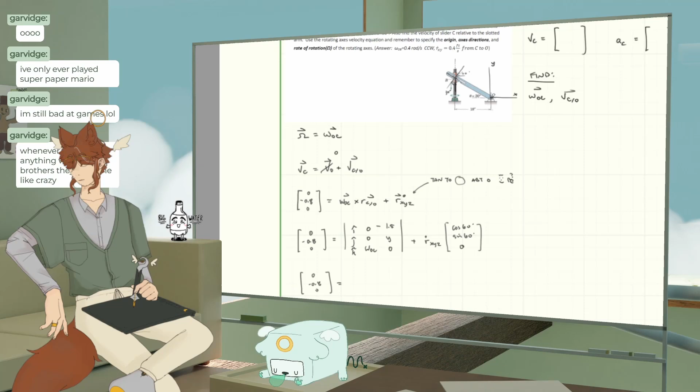I redid this, by the way, and I figured out what I did wrong, just in case anybody's interested. The thing about rotating axes is we were defining it like this, which you can do, and it's actually not that bad to do in this case, but I think one velocity I had defined wrong - I defined it in the global axis, not the local rotating axis, and I was getting the wrong answer. So I redid it in an offset rotating axis from the link, so the rotating axis is still in X and Y. We define it all in X and Y, which to me is still kind of like I'm trying to see how it would look. But it's just that this rotating axis sort of rotates with it, which to me is like, why would you do that? But I guess it makes sense, it's just about the geometry you're given.

I don't know if I started this one. Okay, I'll do work with you, sigh.

I should play Danganronpa 2 on stream. I feel like that would be fun.

Maybe I'll try and make Sundays like - 260 assignments, holy shit. I think I have like 40 that I grade per week, because they're group assignments, and the groups range from like 2 to 5 people, but usually land around 3 or 4. So it's probably like 120 people - I only grade for 3 sections. They're really easy to grade too. I should probably be nicer, I realize I feel like I'm a mean grader, but I'd rather them get a bad grade and think 'okay, I actually need to step this up' than be nice and get a grade and then not do any work, because it's a small part of the grade for the thing I'm grading.

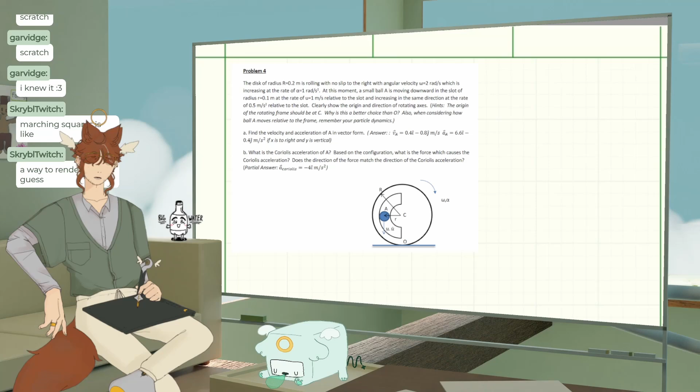I'm skipping problem 3, by the way, because it depends on problem 2, so once I try problem 4, we have to do acceleration and velocity, so this will probably help.

Oh god, also the Coriolis. I took a quiz on the Coriolis acceleration, it was just vector directions. I got a 4 out of 10 on it, so we're gonna figure it out here.

So a grid of points with value... oh, no, it was okay.

The quizzes are like 5%, and there's one that happens every homework plus extra ones. Getting a 4 out of 10 is kind of funny. It was 5 questions, each worth 2 points, so I got 3 wrong.

Some of them I second guessed myself, so the first thing I answered was right, and then I was like, I don't think it's that. I was also doing it in my head, which is bad.

So a grid of points with value 0 to 1. Some square marches across this grid checks the points at its corners. Oh, interesting.

Okay, let me write some givens. Is rolling with no slip to a right. Okay, so R, that's probably not useful right now. Maybe it is. No, it's not. I lied, I don't know why I wrote that twice. Angular velocity to the right with angular velocity 2 radians per second, that's negative. Plot omega c.

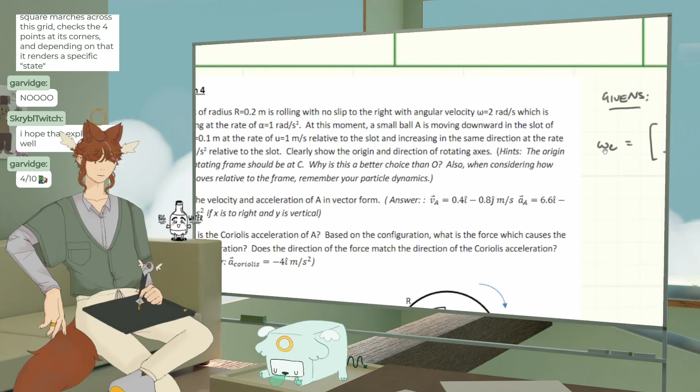Yeah, clockwise, increasing at a rate of 1.

At this moment, the small ball A is moving downward in the slot of radius 0.1 at the rate of that. Oh, interesting. So velocity, this is r dot, xyz of A. I guess I can just say that.

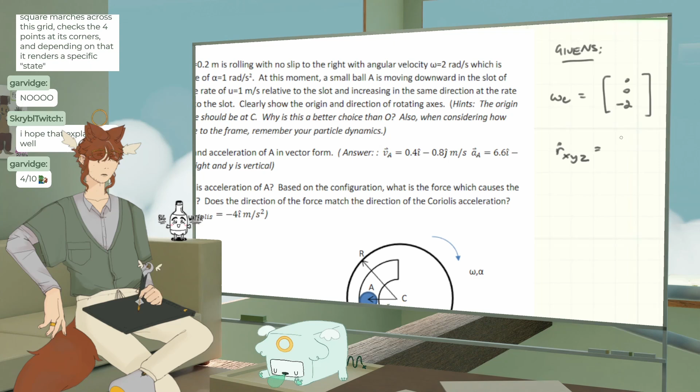So the thing I don't really... I found a little thing in PETG and I've been trying to break it. I can't. Actually it's very interesting.

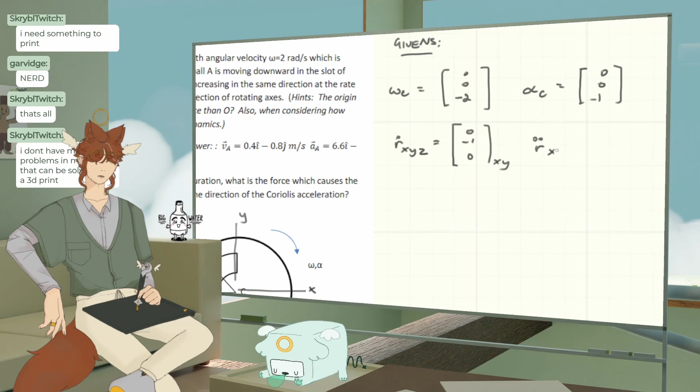Still, it's still kind of churning in my brain to figure out, because I'm so used to the relative velocities being not the actual velocities, you know? Don't have many problems in my life that can be solved with a 3D print.

Well, what if you want to make a desk organizer, or make a phone holder, or something like that.

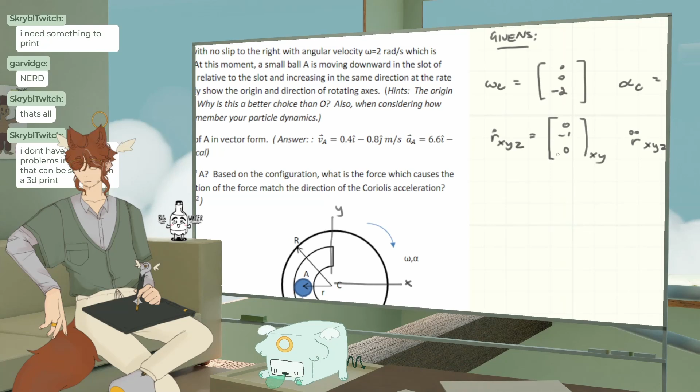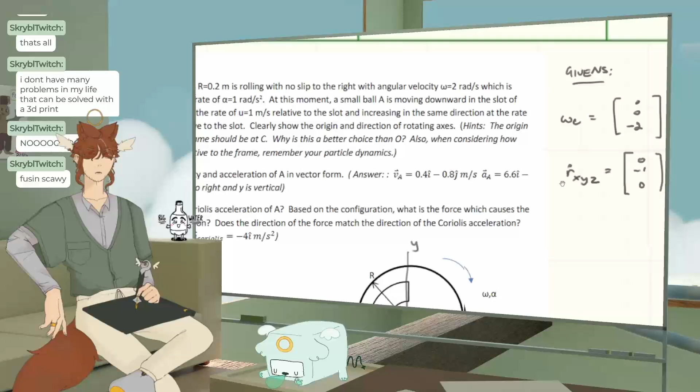No? Damn, Fusion's so not scary. But I guess that's because I came from SolidWorks, and SolidWorks is like, oh, you wanna undo something? Fuck you, I'm deleting your whole model.

Clearly show the origin. Okay, the origin is C, and the direction of the rotating axes. The origin of the rotating frame should be at C. Yeah, I figured. Also, when considering how, yeah. Find the velocity and acceleration of A in vector form.

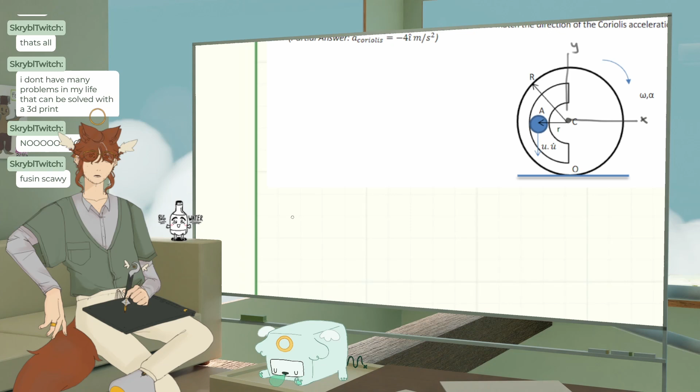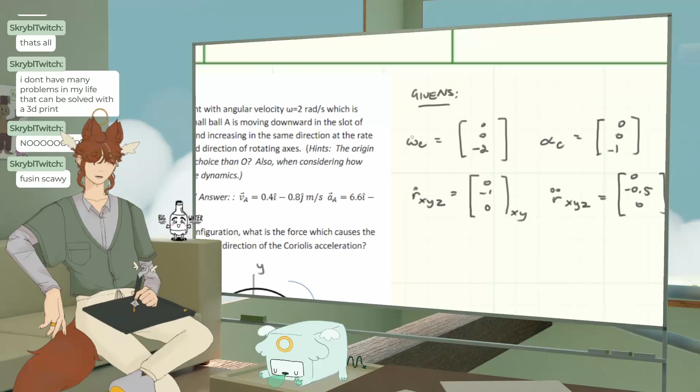Okay, so omega. I keep thinking, I don't know why, I don't remember where I heard this, but there's one person who said like omega bobega, and every time I write omega now, I just think of that. It's really silly. Sorry guys.

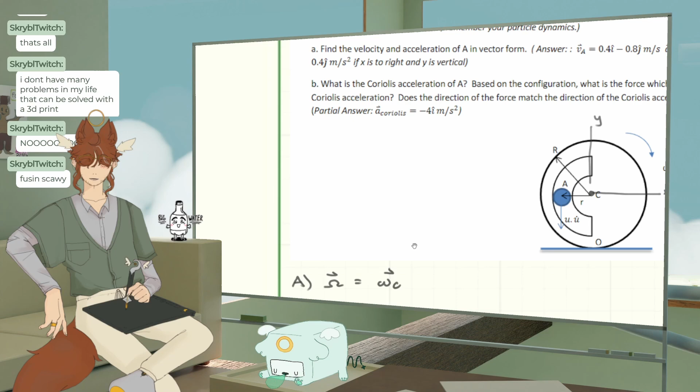I'm sorry for being silly in my intermediate dynamics class. Somebody was asking me about one of these questions. I'm like, I'm gonna be real, dog, I haven't done any one but number 1, and I got number 1 wrong the first time I did it like 3 times. So,

Alright, V of A equals V of O plus, no, sorry, V of C plus, oh shit, C is moving. We can figure that out. Plus omega cross R, C with respect to A.

Nope, that's not right. A with respect to C plus R X Y Z, R dot. I need to figure out a better notation than R dot because I'm so blind to these. I write these and then I just don't look at them. I don't know how to fix that. I'm just dumb. So omega C cross, I'll write it out.

Omega C cross R C with respect to O, plus omega C cross R A with respect to C plus, and if I get this right, then the world is awesome and everything is great. I can write this down. Nope, that's the wrong one.

Okay, so omega C cross R C with respect to O. Omega C is 0, 0, -2. I've also been trying to be a little bit better about some of these easy cross products,

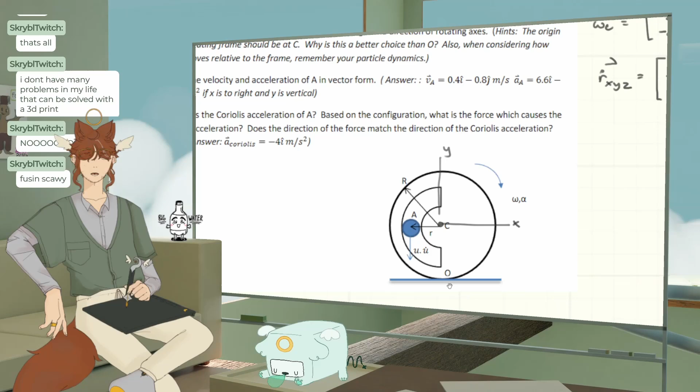I really have no clue. No clue about intermediate dynamics. It's okay, you don't need a clue.

Let's see, negative K crossed with negative I, positive J. And then I think this is right. The velocities I'm good at.

I'm chilling. Oh, printing. Should I help with printing or with intermediate dynamics or?

Wait, shoot, 0.4, negative 0.8. There we go, baby. Or am I? You can keep grading, go ahead. I got it, look at this, beautiful.

My office hours don't start yet, though. My office hours are when I'm live.

Okay, I chose the right coordinate system too, which is good. I'll get it, I just don't understand the... I think for the other one, I need to have something that defines the other velocity, so then it doesn't, like... I don't know, so many unknowns.

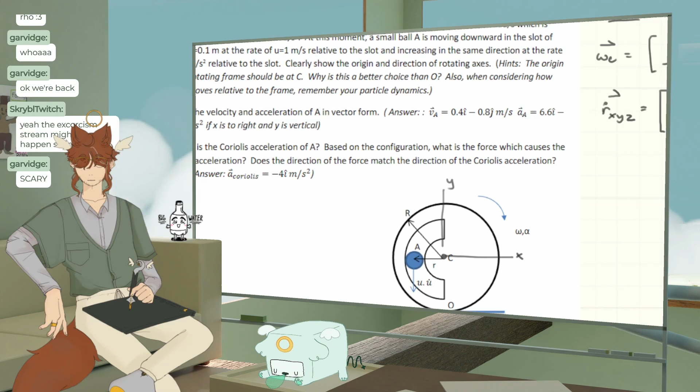Let me see if my settings changed. It was a mixing thing before. Man, that's so annoying, now I gotta put a blacklist on this stream, so I have to edit it. Needs editing, what is this called? This is the 10.6, okay. Man, okay, well whatever. What was I doing? Oh, I was checking my settings, I just closed them, fuck. Sound, did we play sound? No. Input. What the what, wait, output. I don't know, that might not be it. All sound devices. That is the speakers, that is not it. Wait, oh wait. I don't know. I'll look into it again. Fuck, that's so annoying, oh my god. Well, whatever, it is what it is.

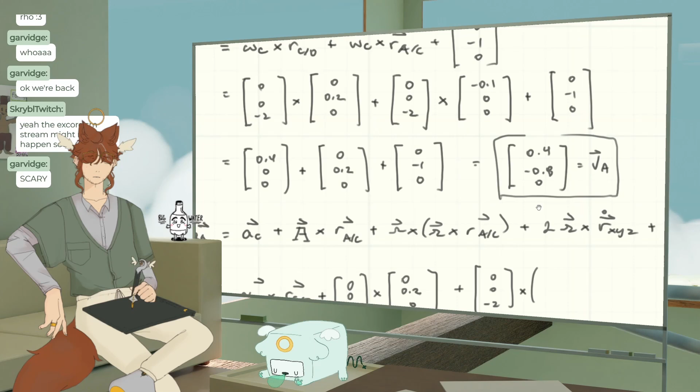What was Big Alpha? Big Alpha was 0, 0, -1. RAC is 0, 2. Plus, okay, the cross products. Omega is 0, 0, -2, crossed with 0, 0, -2, crossed with... wait no, we crossed this already. Omega cross RAC is right here, so that's this one. That is one of the things I like about these problems, is you get to reuse that. And then 2 times omega cross r dot xyz, did we do that one? I don't think so. R dot is 0, negative 1, 0, plus 0, negative 0, okay. A long boy, oh I just started putting stuff in there. Oh I guess it's okay. Alpha C is 0, negative 1, 0. Wait, right? Yeah, I said it wrong, but yeah. R C O is the 0, 0.2, okay. Now we can start.

So negative k crossed with j is regular I. Yeah? Yeah, negative k crossed j, regular I, hopefully. And then negative k cross, that's negative I, times 2. The rubric to this assignment is wrong? Oh, is it like out of a certain points and they made it out of too many or something? They reuse it and they just like... negative times that is, wait, k crossed with j is negative I, that's positive. Yep. It includes an example for the correct answer, and their example is wrong. Oh, like it has an issue in it?

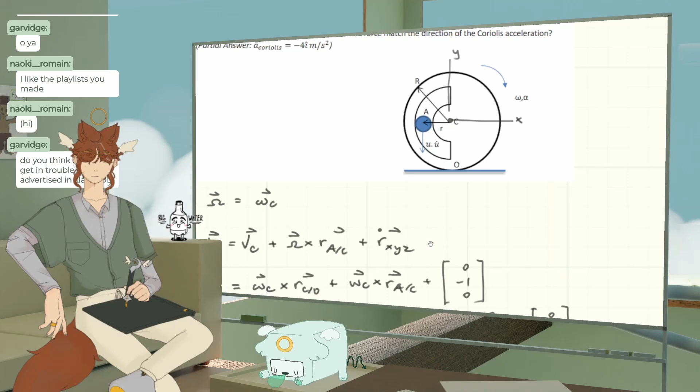Oh shit, what did I... fuck, oh shit. It needs to be positive. How is it positive? Wait, if Y is vertical, yeah, how is it positive? Because this would be negative. Wait, increasing in the same direction. Yeah, what? Oh my god. Okay, okay, well let me check my other signs.

Get rid of this. Okay, so omega is... yeah, okay, so omega is good, and then omega here is good, and that one doesn't need an omega. And then this one, omega cross R-A-C, that is this one, which is this one, which is this one. Okay, and then this one is good. This one, R-X-Y-Z, yeah, that one's chill, and that other one should also be chill. What?

What if I just delete it and redo it? I feel like that's the one thing that never gets easier about engineering, is just accepting that you have to delete stuff. It's so sad. Omega C is 0, 0, negative 2. And C with respect to O is the... point 2.

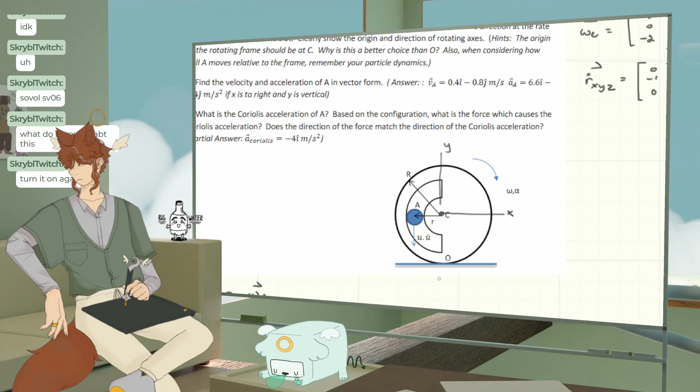Well, you Google it - you say Sovol ejecting sparks from outlet.

Nothing. Did you put the word Reddit after Sovol 3D printer sparks when plugged in? Printer giving shocks and sparks, one year ago. Unplug it and go through the wiring. That's bad - bad grounding in your printer or plug-in electrical system. Ditch the adapter, it's not grounded. Power plug's probably not grounded. Get the fuck away from that.

Yeah, if your plugs are - yeah, that could be a house electrical issue. Thumbs up.

Maybe the outlets in my house aren't grounded. Like what, if your house is old, it's possible?

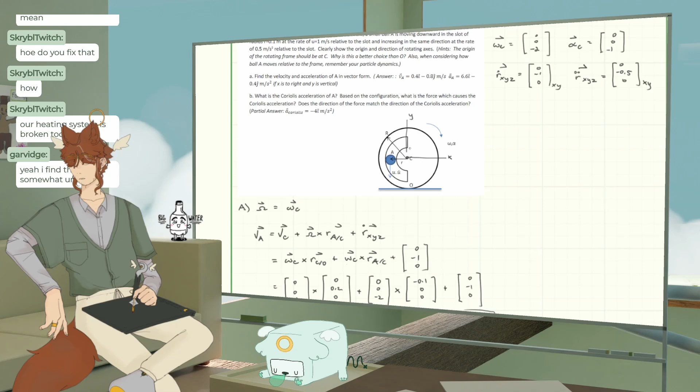That shouldn't be like... wait, how do you fix that? Well, to ground it, you just have to essentially connect your system to... I find that somewhat unlikely.

It's probably not, but I mean if you said it gives a blue light when you plug things in sometimes, and it's not just your printer, then maybe it's possible. Or maybe something happened where... did you try it in a different...

Oh, the transformer died and the system is so old. It is an oldish house. Okay wait, for every outlet? Yeah, I was gonna say, maybe try plugging it into a different outlet.

Or maybe try plugging it into like a friend's outlet, in a house that's not... maybe it's just that. Maybe try plugging it in downstairs if you plugged it in upstairs before.

Did I have a... maybe my radius... let's see, my radius from A to C is negative, that's right. Our A to C is just that. It shouldn't be...

I have plugged it in downstairs, and it gave the sparks. I mean, there's also the likelihood that it's just like...

Maybe it is, like if you put it in 120 and you plugged it into 240, then you probably fried the motherboard. So if you did do that somehow, I don't know, that doesn't seem likely because EU is not 120, but...

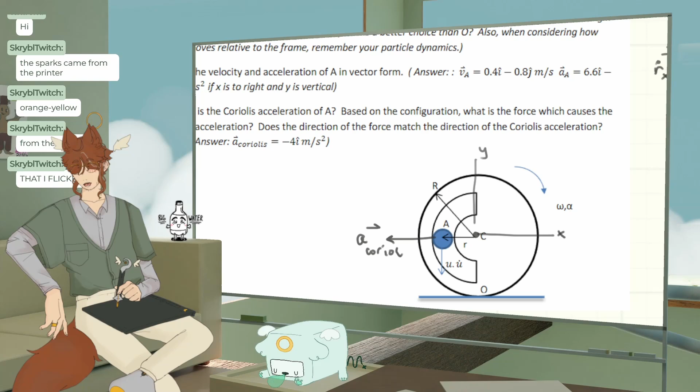Like the plug? Okay, maybe. It's gotta be like, no, this is from the switch. Okay, that's not good. From the switch is not good. I thought you meant from the cord. I don't know. I feel like you should just email the guy. Your printer's like turning into, like, becoming sentient.

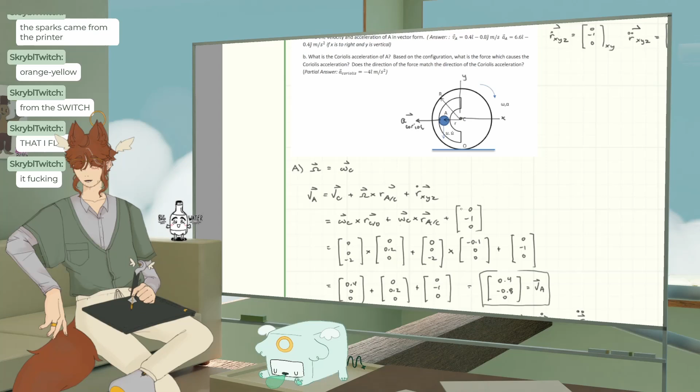Based on the configuration, what is the force that causes the Coriolis acceleration? Does the direction of the force match the Coriolis acceleration? No. It comes from the normal force. It ejected from the edge of the switch.

I don't know what a Sovol switch is. Sovol, I'm thinking of my printer. The switch is a pretty weird place for sparks to come out of.

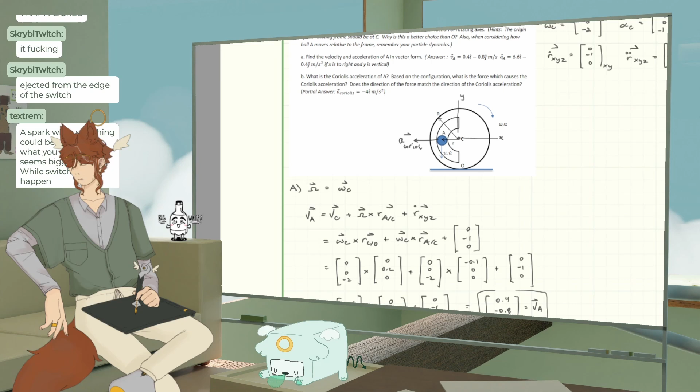Yeah, usually a bigger arc while switching can happen. If it's a large... wait, did you see where it arced to? Maybe it's some... I don't know. If it's arcing, it could be something that got dislodged, there's so many cases. There wasn't an arc. Oh, wait, but there was a spark, right? Oh, the spark, you're saying it just was like a straight line? It wasn't arcing to anything. Well, I don't know if that's better or worse. Again, I'm not the EE.

The force is... yeah, angle grinder, yeah, you mentioned that.

I think it's the normal force that causes that. A true Coriolis acceleration needs a force to cause it. Does the direction of the force match the direction? No, so the directions do not match.

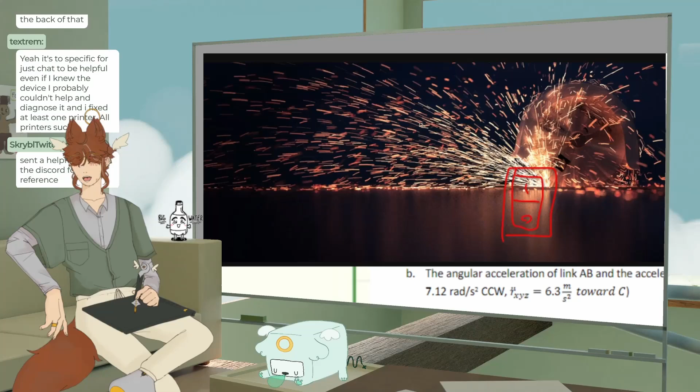Oh my god, okay, yeah, okay, yes. It is, this is the image they sent. It's not exactly helpful. Was it this many? That, I would not plug that back in ever. Let me see, let me... that's crazy. Like a quarter, okay. Power switch starting to bug.

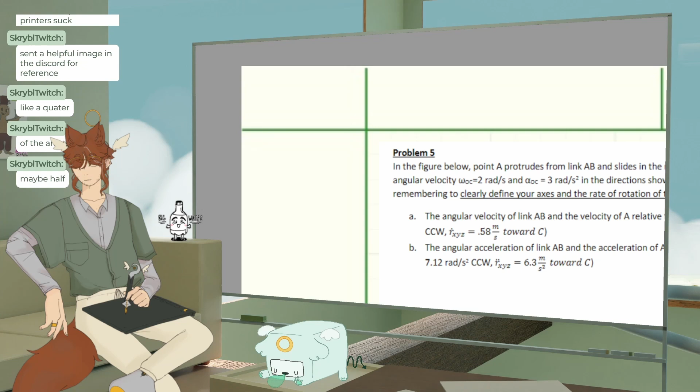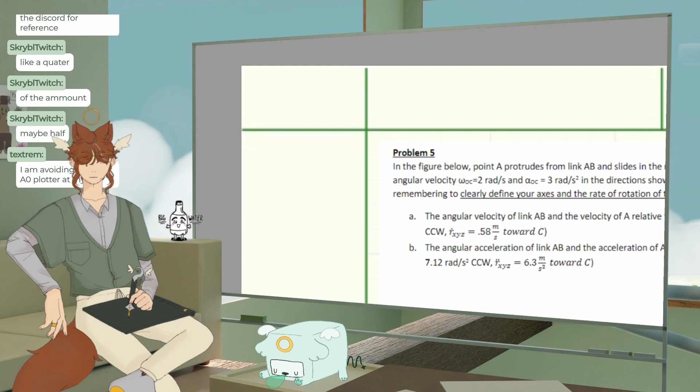Turning off. Wait, look. Oh, no. Oh. June 23rd.

Had also the problem where the switch glitched and noticed it was warm. Took it apart completely and found the metal contacts inside had visible burn marks from arcing, visible melting of the red plastic switch, plus discoloration of the heat shrink of the connected cable. This thing was overheating.

I'm avoiding fixing an A0 plotter at my uni. That's so real. I've never tried using a plotter. What do people actually use plotters for?

It says... Okay, this was 2023. I would, if you have warranty, email support and they'll probably help you out. That's what it seems like. Because if you replace it, then...

Why do I keep seeing small sparks from the light outlet? Yeah, voltage spike across the contacts. That's just like that's how it be. We get a little arc sometimes when we plug things in because of that.

I was removing my PEI sheet today and noticed sparks jump from the PEI sheet to the pins used to align it at the back of the plate. Anyone have this issue? Not sure what might be causing this, but disturbing nonetheless. Solved. USB sparks. USB sparks.

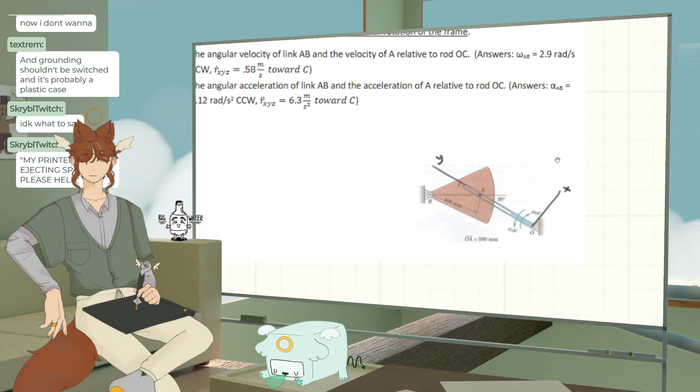Grounding shouldn't be switched, and it's probably a plastic case. It might be metal, a lot of printers have metal frames, like aluminum extrusion. I don't know what to say to support. Say hey, yeah literally you could say that probably. We'll tell them where the sparks are, and maybe send them a picture of the switch. Or just tell them that and then say what you did to try and fix it.

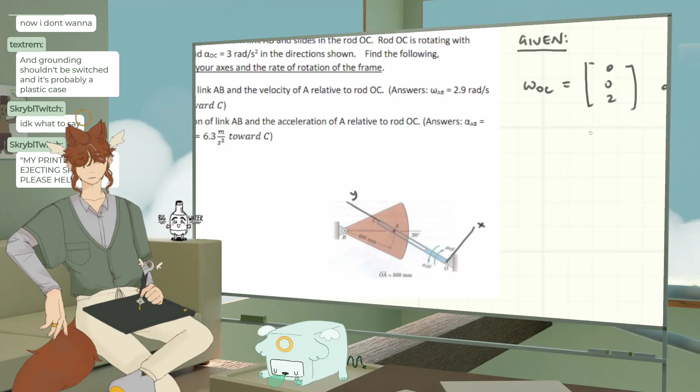Slides in rod OC. OC is, so omega OC is alpha OC is what, 3 radians per second squared in the direction shown. Okay, so that one's positive, that one's, oh, that's really hard to see. No, alpha's positive, omega's negative.

I'm sorry they're ejecting sparks though, that must be so sad.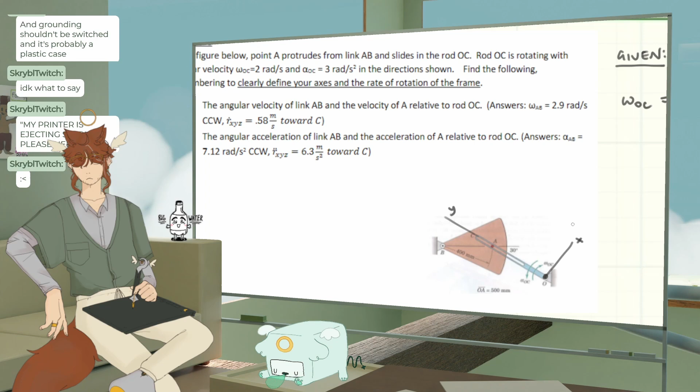Find the following, remembering to clearly define your axes and state the rate of rotation of the frame. Okay, my axes are defined. I guess, wait. OA is 500 meters. Okay, that's good. Millimeters. Yeah, I think this is a good...

As a mechie, I really love stuff like this, where it's like, oh, we just want to do this one thing mechanically. Or laser, we had both of them. Oh, laser cutter? That would be fun. I would love to try and design a printer, that would be so sick. I don't think I would be good enough, but I would enjoy it. I feel like you have to work with materials engineers, also.

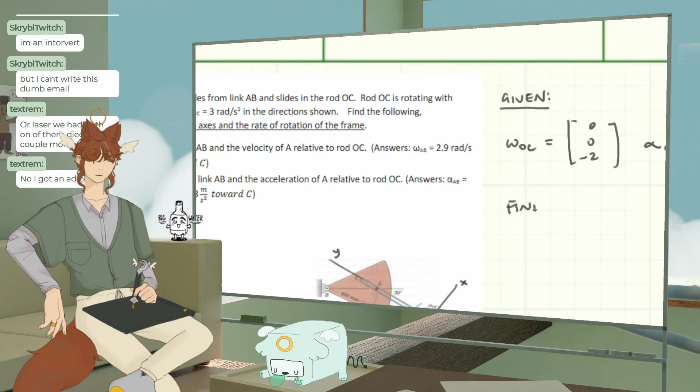So we want... find... oops. What do we want? AB... angular acceleration. Oh, angular velocity of AB. So omega AB... R, X, Y, Z. I don't really like the notation of this. This is like...

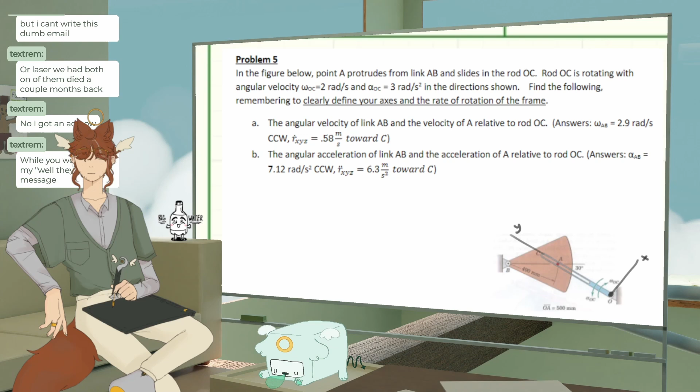Oh, well, they're just giant inkjets, and I'm more specifically interested in offshore wind and infrastructure. Yeah, I like doing stuff like this, where it's little systems that we kind of want outputs for. I would love to design like a 3D printer or something, it would be really cool.

I feel like maybe I'm getting this wrong because I'm not...

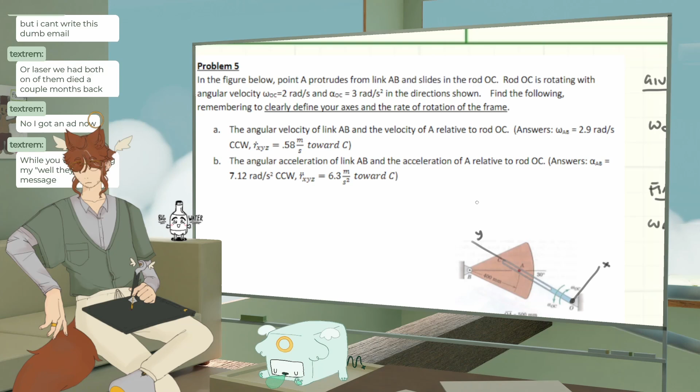No, that's just the acceleration of A that I was getting wrong. I don't know if they mean VO plus VA with respect to O, and this whole thing, so that would be the omega cross and the R. Or if they just mean the omega cross part. I think they mean both. We want VA of our little bit that's moving, and then VO, which is 0, plus omega OA. Do we know it? No, we don't.

I've heard it's better if you schedule for viewership growth. Yeah, probably, I never really... honestly, I probably should. I had never thought about it before because normally I don't have that many viewers, let's just be real. And a lot of people also kind of listen to me in the background, so... but maybe I should think about it. Maybe that would be better. I could do that.

Can you play League of Legends? Do you think I could play a game of League of Legends while doing a Dynamics problem at the same time? I've never played League, how involved is it? Is it like I have to actually do shit, or is it like watching shit happen?

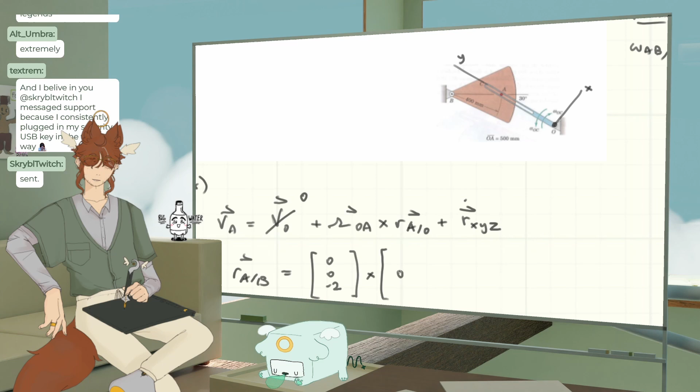When I worked, I did some support stuff, and I always liked answering the questions that were really easy because they were just like, it's chill, you know? It's like... okay, there we go, that's right. I have to just be careful because if I don't define this the right way.

What's the deal with outlets in my house glowing blue sometimes? I think google.com shall give us an answer that we seek. Why are my outlets glowing blue? Can you explain where the blue glow is happening? Why does an electrical socket emit blue-white light sometimes? Yo, your electrical system seems fucked. It's blue because the color is given off from nitrogen and oxygen gas in our atmosphere when they are excited, when the metal contacts are close enough for the electricity to move through the air. This is sparking that happens when an electrical arc is created in the air. If it is not stopped, it will cause a fire. 100% guarantee of fire if the sparking lasts more than a few seconds.

This is perfectly normal for certain types of power supplies. Well, that's the... you are creating plasma. It happens when an electric current is passing through a gas. It's called an electric arc. Sorry, I'm reading Reddit, some of these are not going to be right.

It happens as soon as I plug in the device, and it's only a flash and then goes away. It's startling and makes me jump. Good, that is normal, unsettling a bit, but as long as it doesn't happen on its own and you keep your hands away from the metal bits, you're perfectly safe. That's what it says, so... Does it happen only a little bit, or does it happen a lot? If it only happens a little bit, then it's fine. Then you're okay, it's normal. It's just like a voltage thing. Because electricity is weird, it happens like a 25% chance when I plug in some charger. That should be okay, I think.

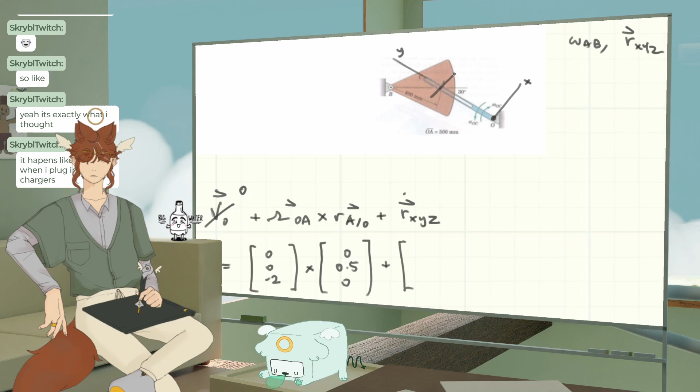Do I know RXYZ? I don't think so. I don't think I do. Do I know the direction of RXYZ? Yeah, it has to move around this way. But that's crazy. 60... sorry, I'm just talking to myself. Oh wait, shoot, no, it's not 60. It's just X. Oh, that's cool.

Been an electrician for a bit and rarely seen something like that, and I'm in Germany. While plugging in or taking shit out, it may happen. Oh, we got an expert in chat, thank god, because I do not know anything about EE.

Omega AB cross RAB is... RA with respect to B. Now we have to do the math, which is a little unfortunate.

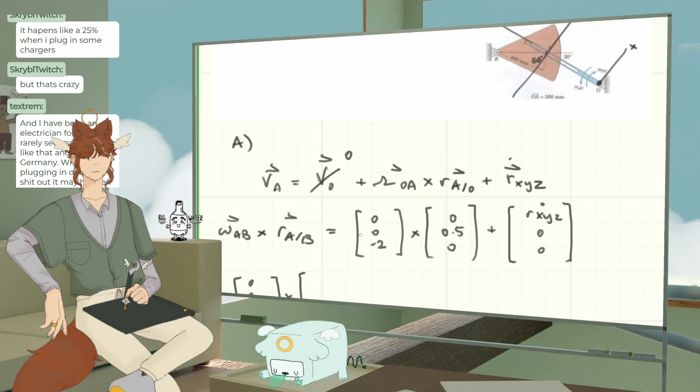That's 30, this is 60. Alright, in the x direction we have cosine. That's 0.4 cos 60, and 0.4 sine 60. Oh, that's actually not too bad. And it's negative there.

This one we're gonna have to do a cross product for, so I'll just write that in. A less fun cross product, I guess.

In my apprenticeship, I was mostly fixing home appliances like washing machines. Oh, interesting, you did an apprenticeship! Very interesting, I don't know a lot of people who do that, but I also don't go to a trade school. I guess you don't have to go to a trade school to do an apprenticeship, but for most of the mechies here, we tend to do internships instead.

Negative K crossed with J, so positive I.

Okay, we're making good enough headway where I think we might be able to finish this, which is great, because I didn't know if I was going to. Got a ping.

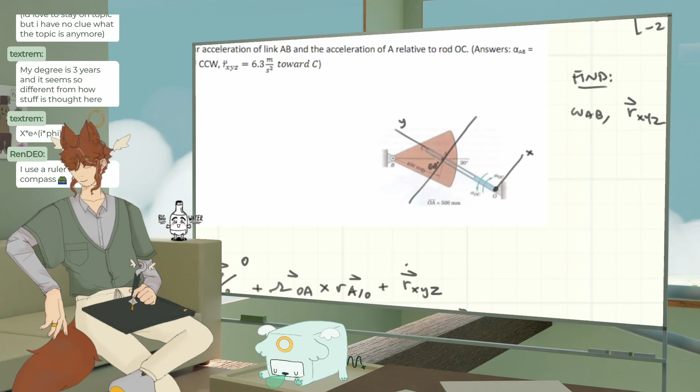I use a ruler and compass. Ooh, I miss my compass. I haven't used a compass in, man, like a year and a half or something like that.

My detailed drafting course, my degree is 3 years, and it seems so different from how stuff is taught here. Yeah, it's very interesting. I think the one thing I do like about it is I think it's a very accessible curriculum, which in some ways is good and in some ways is bad, because it's a little bit less rigorous than I think is good for a really stellar engineer. But a lot of the time you don't really need stellar engineers, and there aren't enough people who want to perform at that really high level. So I think that's why this sort of course I'm in is the way that it is.

But yeah, there's some good stuff. I definitely also on stream, I feel like I try to do my best I can to make it better than the raw stuff that I get thrown at me.

There's an MSc guy who's making a case for taking a historical approach to the subject: Euclidean, projective, non-Euclidean, differential, commutative algebra and curves, classic algebraic geometry, scheme theory.

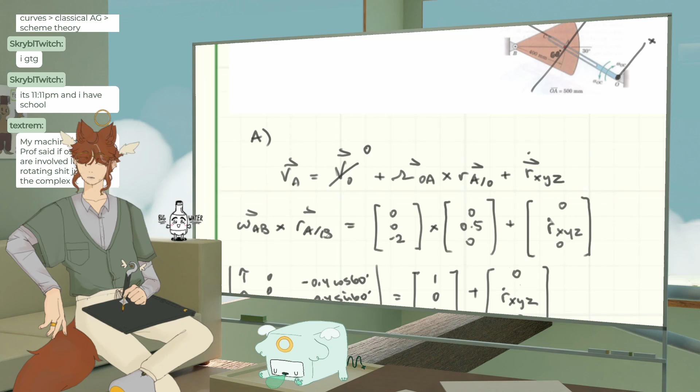My machine dynamics professor said if oscillations are involved, like some rotating shit, just go to the complex. It's interesting, we have a whole class on vibrations as well. I think it's because a lot of people end up in... we have a lot of partnerships with HVAC for my school specifically. So I think the fact that there's more vibrations, more of that kind of stuff, it also kind of depends because the concentration you take is more or less important. Like we have mechatronics and stuff, and mechatronics people have to take vibrations, and I'm in general because I just don't have a concentration really. So if you're doing mechatronics, you kind of have to know about vibration. And I think just the effect of, for audio engineering too if you were to go into that—I don't know, I'm kind of talking out my butt.

Projective geometry is pretty nifty. It's the geometry of high dimension perspective drawing. Oh, vanishing points, horizon lines. Interesting.

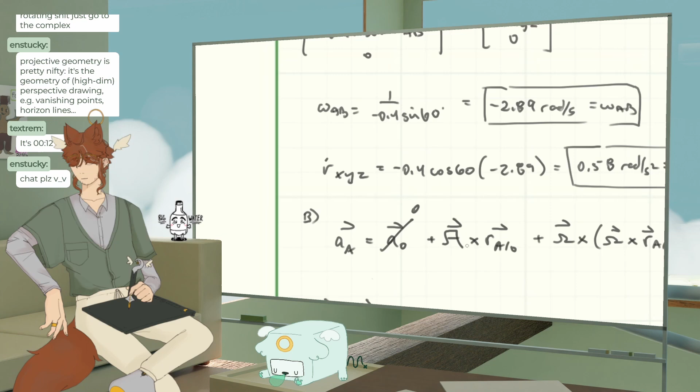Oh my gosh, it's 12. 12, 12, chat please. That's interesting.

So, just being able to describe those mathematically. What alpha do I have? I have, okay, alpha OC, which I think is the thing that I need. RA with respect to O. I should probably be redefining these myself until I get more comfortable with it.

2, -2? Uh-oh, it's not -2, that's positive. One of these is positive. Alpha is positive. And that's why we check things. -2. And then this one is... Nod, nod. Okay, that's sick.

I really want to learn enough about the language of proofs that I can read proofs. Because right now it's like, I can read them, but I wouldn't be able to write them. And I don't know all of the different higher level stuff about them.

0, 0, -2. R, X, Y, Z. We found that. So it's in the... it's 0.58 there. And this other one we don't know. Now this one will be in the possible same direction. But we don't know which way, so that's fine. We'll just assume it's positive. Okay, I think that should be good.

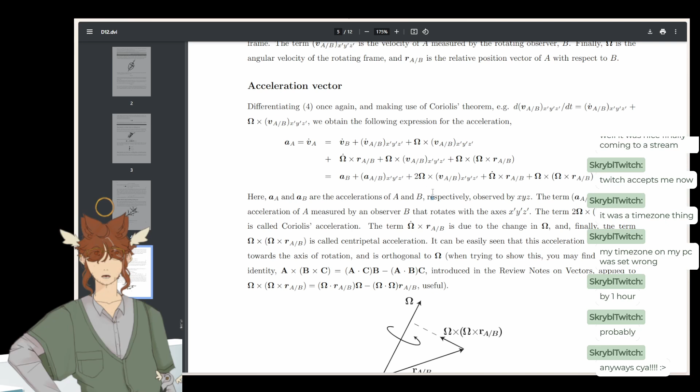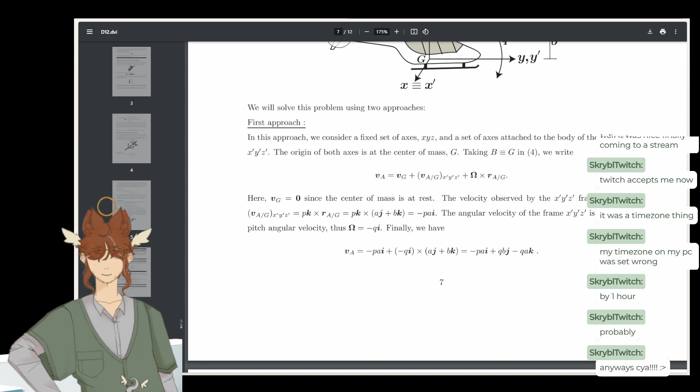No, when writing... that's fine. O equals negative... 0 equals negative this. Okay. So basically it's fine, I don't know what I'm doing wrong then. Let me change this to... I'll just change it to clip so I don't fuck everything up.

Let's see, so where is this hidden issue? We're supposed to be getting 6.6 I, and -4, I'm getting -4. If x is to the right and y is vertical, wait, I'm getting negative downward. -4, coming down.

Which, okay, let's just be clear. Well, okay, I guess if it's the acceleration, it could be going down. But I was gonna say, the velocity of it's probably going up a little bit. Hmm, 6.6 I.

Minus, oh wait, what is minus? Wait, okay, so we got that one right. So the 6.6 I is the only thing we have wrong. Okay, wait, we're closer then. Okay, so this part is right. But what about that 3.4?

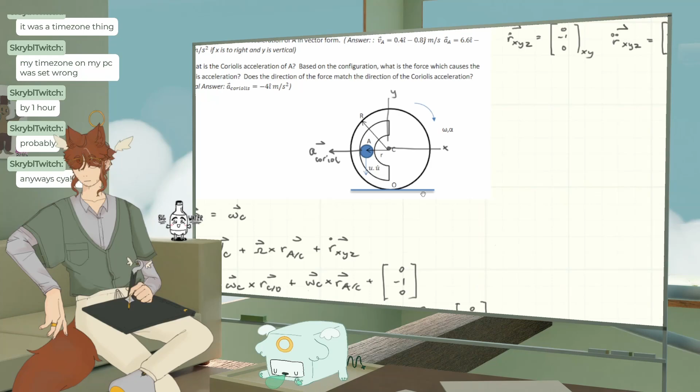Maybe this negative here is not negative. No, it's negative, it's definitely negative, it's definitely negative. Maybe this is supposed to be negative, the 0.2? What is the 0.2? 0.2 should be R A with respect to C. A with respect to C is negative. Okay, so that solved that problem.

So this is negative K crossed with negative J, which leads to a negative I. Wait, that didn't really solve the problem. Wait, yeah, because... wait a second. Wait a second, we didn't really solve the problem. Wait, that made the problem worse.

God damn it. Wait, this is supposed to be 2. No, wait, that's also wrong. What the heck is happening? Okay.

Omega is definitely -2, that one's not changing. R dot XYZ, is that definitely -1? Yeah, it's definitely -1. So what are we doing? What are we doing? And the radius doesn't matter here.

Oh wait, no, that one's fine. That one isn't gonna affect anything. So it's something over here, maybe?

I wrote up a short guide for your ANSYS troubles for computers, it's already been installed on. Oh my goodness, can you share that? That would be beautiful. You'd also be saving all of my friends, by the way, because none of us want to use ANSYS.

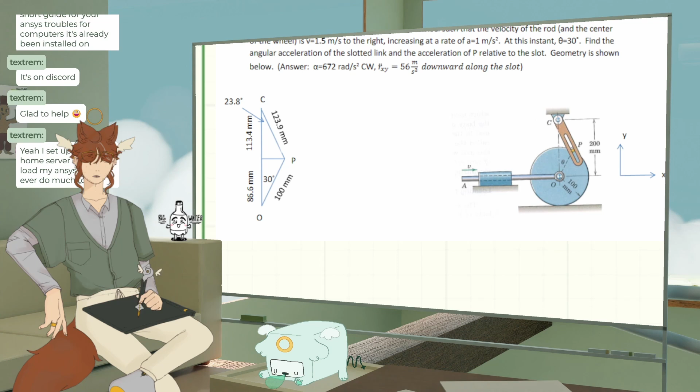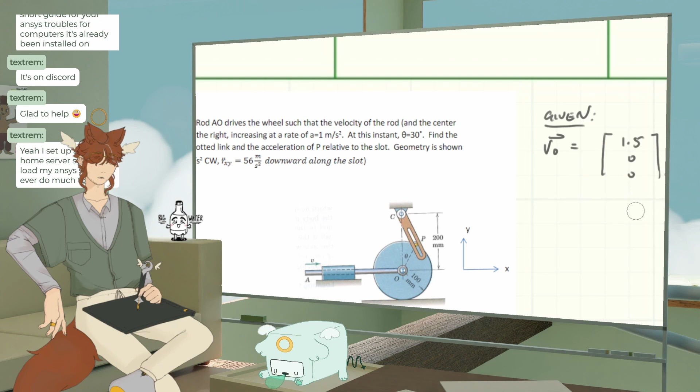Alright. Rod AO drives the wheel such that the velocity of the rod is 1.5 to the right, so 0, 1... wow, not what I want, 1.5, 0, 0. In XY, but I think our rotating one is probably going to be similar, or actually maybe not, maybe not. Yeah, we're probably going to have it be that. Yeah, they give this as our coordinate system, so I'm just going to do that as well. Okay.

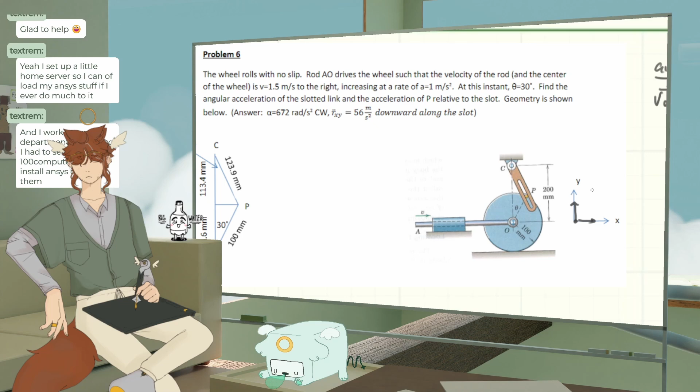Increasing at a rate of... oh, that's a little unfortunate, but that's okay. I don't need to put that there.

I work at my department's IT stuff, so I had to set up 100 computers and install ANSYS on 30 of them. Oh my gosh, that's a lot of ANSYS. Do you guys have, like... It was interesting, my professor was like, so you're not gonna have, like, all the modules on ANSYS if you do that. You're only gonna have, like, 1 or 2 if you work for a company that has it. You guys just use it for the geometry stuff? Like geometry and stress things? Or also fluids, or...

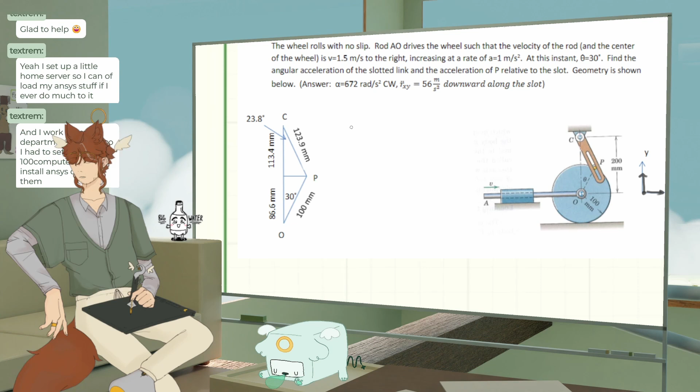I'm not really sure why this is here. Oh, I see why that's there, never mind. Why couldn't they just have made it symmetric? It's kind of crazy. Nah, it's not that crazy.

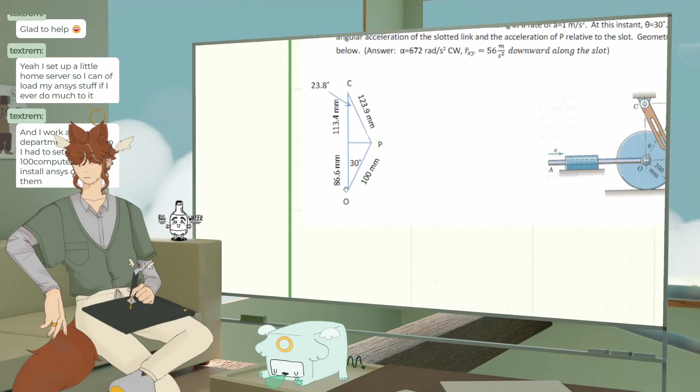Find the acceleration of the slotted link and the acceleration of P relative to the slot. So, angular acceleration of the slotted link, so PC, alpha PC, then R, XYZ, E. Okay, so omega equals omega, what are we tilting with?

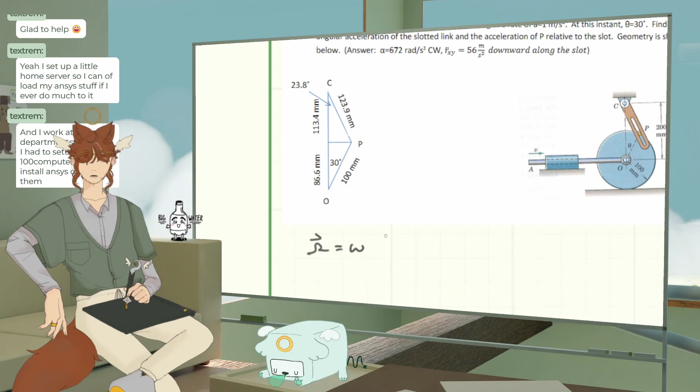I guess we're going to be tilting with... but wait, we don't want XY there. Well, you know, I guess we could do that. I'll just say XY is not the origin.

Well, we have to do it at C, I think. Right, because we're turning around C. So just ignore that I drew those there.

Wait, we don't know omega PC. Is that an issue? Not really, because if we try to define it with respect to O, then it's just like, we know the velocity, we don't care about that. We need...

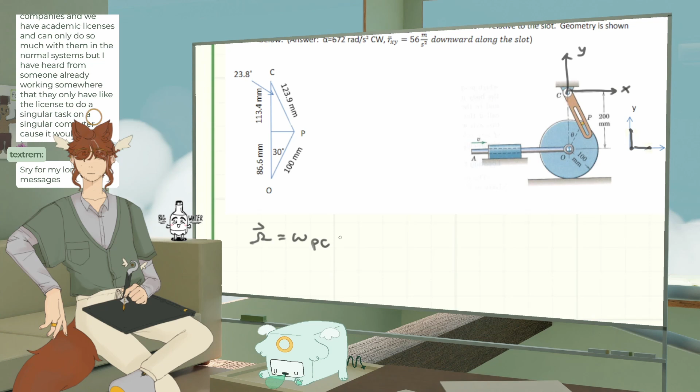Whoa. No, it's chill, it's cool, expensive. We got an academic research license, it's worth like, I don't know how much that is. That's a lot of zeros. We have academic licenses and only can do so much with them. Yeah, they only have a license to do a single task on a single computer. That is what I heard as well. Yeah, the student license is like, it stops you from having a certain amount of nodes or something. I think they sponsor my university though, so we get like a discount probably on our stuff.

What am I setting up? I want VP equals VC plus omega cross R P with respect to C. Oh shoot. Oh no, wait, no, we don't want, oh no.

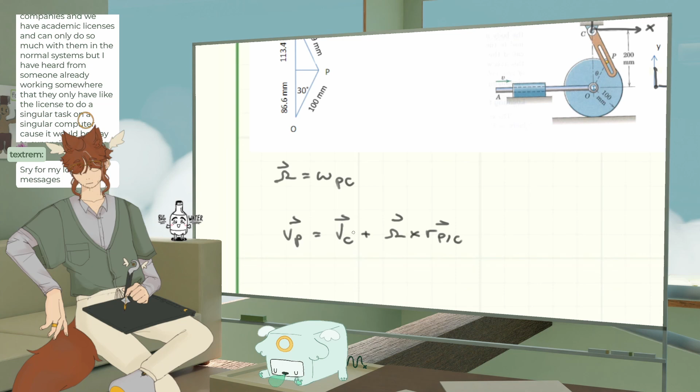No, that's okay. It's okay, because this one we're gonna expand into the VO, plus R, X, Y, Z.

So this is omega O cross R, P with respect to O.

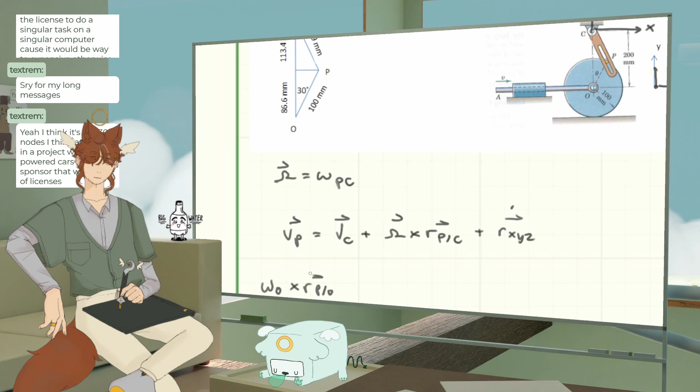I think it's like 30k nodes, and I'm in a project with wind-powered cars, and they sponsor a lot. Yeah, that's kind of like our thing.

Okay, omega is PC, so we don't know PC. Cross R, P with respect to C.

Okay, so in our big coordinate system, the easiest way to do this is going to be...

So x is sine for 123.9. Wait, millimeters, I'm gonna round. Who cares? 0.12 times sine 23.8, 2 times, and then I'll figure out the signs.

I think they're both negative. Yeah, they're both negative. Cosine 23.8, 0. Plus, and we don't know what this is, but we do know that P is gonna, ooh.

Okay. I don't know if I want to set my stuff up like this. Because I guess they do give us the 123.9, so if we didn't split it up, then we could just use the 123.9. But would that mess up everything else?

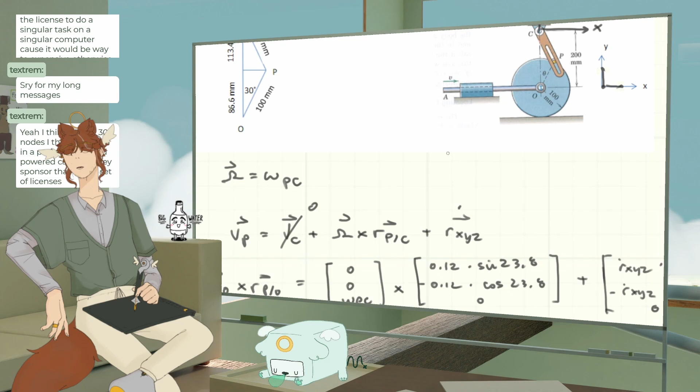That means I have to flip and back calculate this. I mean, I guess I don't really need to deal with it that much. It's gonna be 1.5. Wait, so 1.5 to the right.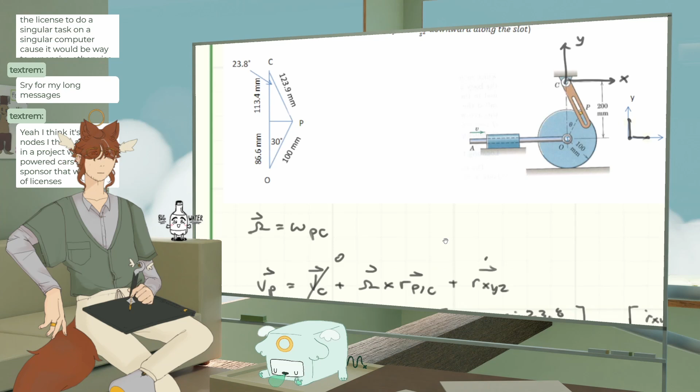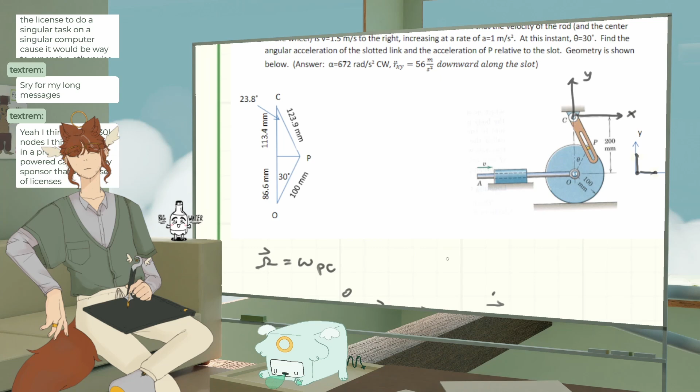Okay. 1.5. Ooh. Fuck, okay. 1.5 divided by 0.1.

I'm trying to think if it's going to the right. Is it rotating up? I think it's rotating up, so that would, like if this is being pushed to the right, it's rotating this way probably. If that messes up, then we're kind of goofed, but it's fine. We're donked, maybe.

I'll put like a star there. I'll put a more colorful star there. Wow, that's really hard to see. Sorry, there we go. Check. Sign, yeah, I don't know.

Okay, let's see. So crossed with... well, this is gonna be 15. And then crossed with R P with respect to O. Man, okay, sure, whatever.

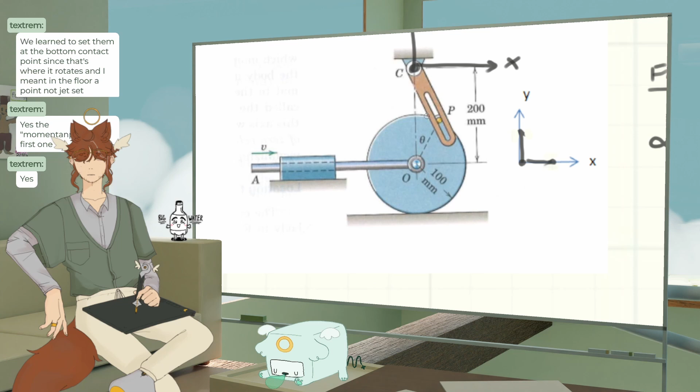Because what we're trying to figure out is, like when you're doing regular dynamics, you want to set it here, and then you can figure out the velocity here, whatever. But we care about this link's movement. We don't know how this link is moving. We already know how the circle, the wheel, is moving.

It's really just that the numbers aren't nice. I think I'm going to try and see if setting it up like this is nicer. Okay, yeah, so it just kind of depends on what you're trying to solve for. It's not that you're wrong, and also you can technically just set it anywhere if you want. It's just more about how easy the numbers will be.

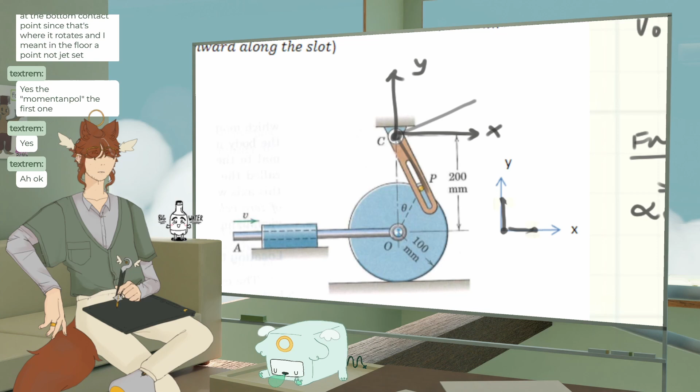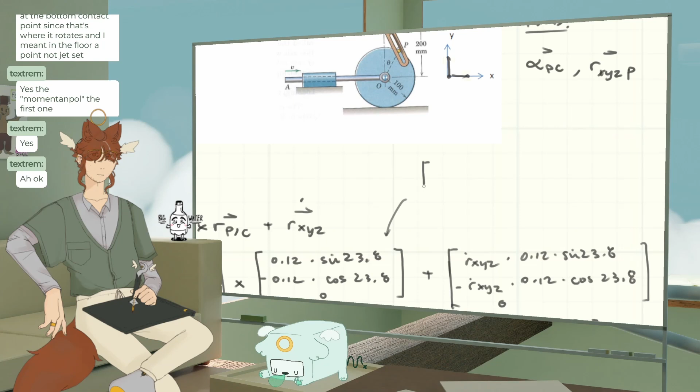Let's see if we set it here. I'm just gonna try and see, because we don't have that many vectors, right? It's just a couple vectors for this. Okay, so omega, this one stays the same. This one becomes R_PC, becomes very simple. We'll call this X, we'll call this Y.

R_PC just becomes... no, I lied, it becomes 123.9. Yeah, positive. And then the other one, R, is also just 123.9 times... yeah, I think this would be easier. Omega AB, or sorry, R_XYZ, like that. And then this one is the one that's hard.

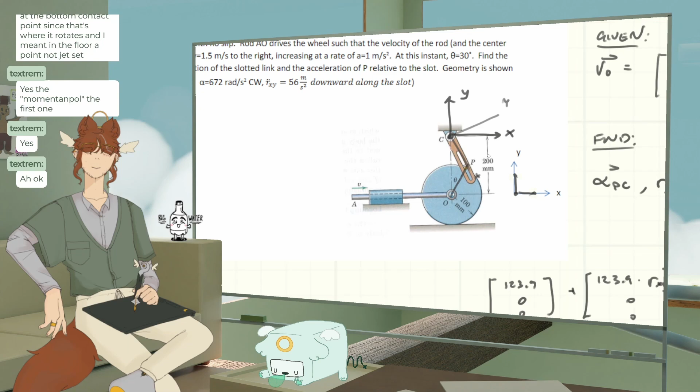So omega O is not hard, that one stays the same. This one, R_P with respect to O, in this coordinate system, looks like this. So we need this angle here, which is... if we have this, we want that angle.

Then what do we have? Yeah.

It's definitely up to what you want, and I don't really understand your notations and basic parameters, but I think I should get some sleep. Alright, see ya. Have a nice sleep.

I need... oh god, geometry. Okay, the geometry is geometry, I believe. Where are my transverse angles?

That one? No, that would be 30 here. And then this one is 23.8? No, no, okay, I was always bad at this. This is where my statics failed me. This is 90. This angle is 90 minus 23.8. Which means that this angle...

There we go. I hope the Ansys stuff works out, but you can reach my Discord. Thank you so much, it's so useful, actually.

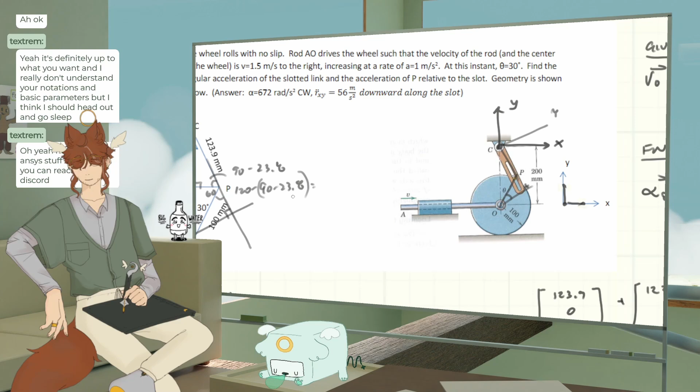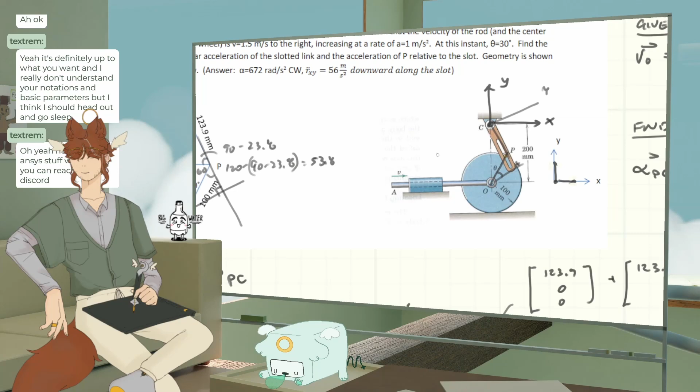53.8 is that angle. So if this is that, then we have the cosine of 53.8, 100 millimeters. So 0.1 cos 53.8. Okay, that's really not that bad.

And P with respect to O is... what? P with respect to O is... oh wait. Oh shoot, that's not it, is it? Is it? No, because the velocity doesn't go along there, it goes along the...

Oh, it's actually easier than what I did. It goes along the tangent to the thing. We get rid of all of this garbage. I'm gonna say the tangent is there.

Now, is it easier? I don't know. We want this in terms of this, and this. I don't know, I did this. This one I don't think. This one is what we want. That's our velocity of P.

And then this is our X, and then 90 degrees to this is Y. So the angle of this is 30. I think? Maybe? Maybe? Because if this is 90...

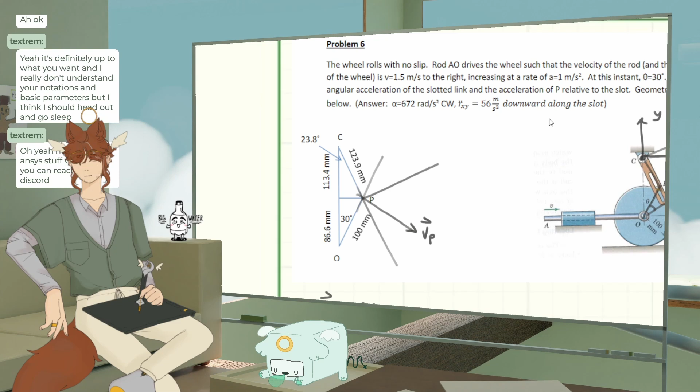I know. We're back to square one. No! I needed RP. Oh, I'm so sad. Oh my god. Wait, okay, it's on the VOD. I can look back at the VOD if I need that value at some time. I need to get rid of this diagram. Wait, I can just draw on top of the diagram. Okay, okay.

We have a mic demon still, so that's not great. I don't know why. Probably not the fact that my calculator's on my desk, but that's what I tried.

Whatever, okay, 6 minutes, we got this. Lock in, okay. This angle we know, we want this, which means that... let me extend these a little bit.

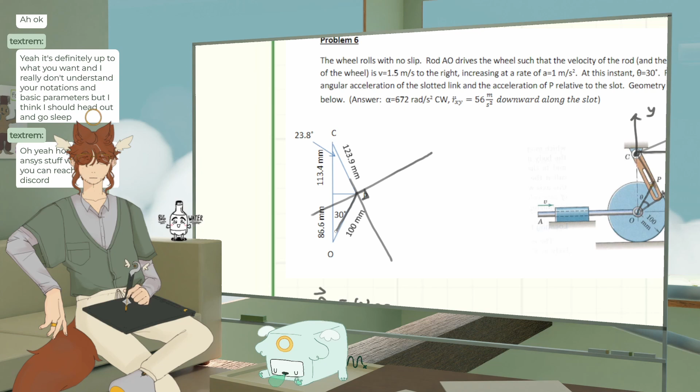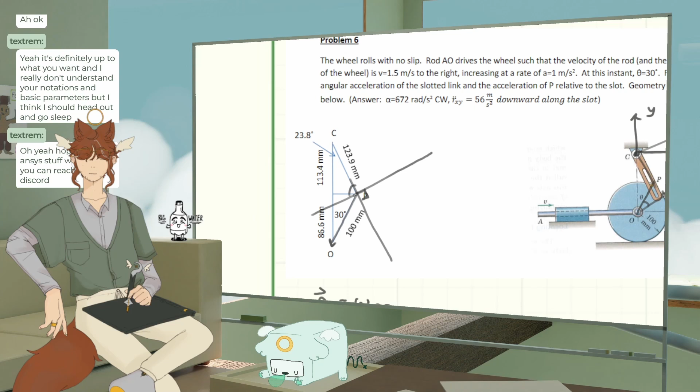Do I know this angle? I don't think so. I know this angle. Oh wait, yeah, I do know that angle. Oh wait, yeah, because this is 90. So this angle is 53.8, 53.2, which means that this angle is 90 minus 53.2. And this angle is 60 minus 90 minus 53.2.

Awesome, because I'm so awesome. I'm awesome, easy clap, literally didn't have any problem with geometry in my entire life, ever.

23.2. So after all that, we get 100, 0.1. Cosine 23.2. That's in the y direction. Sine. Cosine.

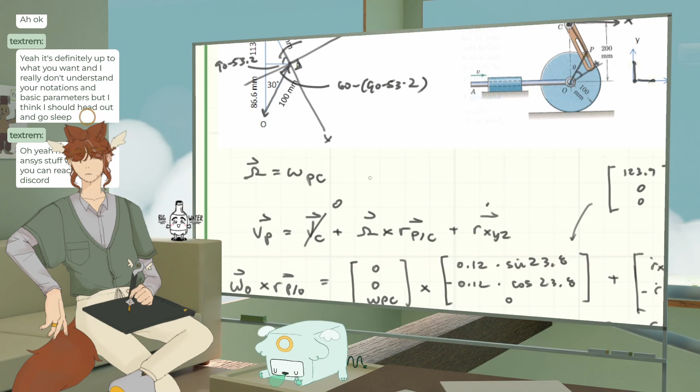Nope, I lied, that's in the x direction. Wait, what? This is x, this is y, this sine. Okay, that's right, it's positive, and the other one is it's this way. So actually both of them are, x is positive, y is negative.

Oh my god, I never want to do that again. Okay, let's just pretend it didn't happen, chat. Holy shit.

Okay, well, I think that's a great place to sign off. We had some great, awesome geometry that we did, and definitely had no pitfalls whatsoever, and it was awesome, and yeah, I'm gonna finish this and see if we get any right answers.

It's gonna be a little rough, a little tight on time. Is this thing due tomorrow night? I'm hoping it's due tomorrow night, not tomorrow morning. Let's see. Yes, due, it's tomorrow night. Nice, okay. Ooh, I'll do a little bit more of it, but yeah, I don't know. I have to do some other stuff tonight, so.

Alright chat, thank you for keeping me sane, keeping me company here. And yeah, I can't get a lot of these. This one I just don't know why. Maybe I'll see if the other person's work is right, but this one, this one is really weird. This one I genuinely don't know about, because I don't know that y value. They don't give you a y value. I don't know.